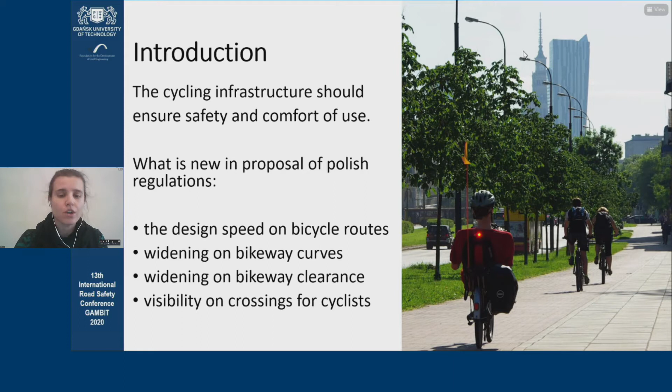There are some other elements there, providing more space, widening of bikeway curves or the clearance. And finally, I would like to talk about visibility within points of collision.

So, what are the particular or special features of cycling? There are three ranges of speed that are important for cycling and for designing cycling infrastructure. Up to 12 kilometers per hour, the cyclist cannot ensure stable traffic. Anything between 12 to 25 kilometers, that's the speed at which an able and adult cyclist goes. And anything above that is not just because the cyclist has a better cycle or is more able, but the gradients may differ, or the weather.

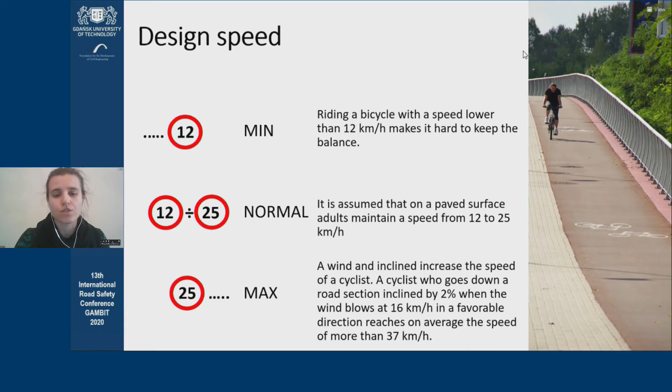And so we ran a study: with a gradient of 2% and wind blowing at 16 kilometers per hour, the cycle speed can go to more than 37 kilometers per hour. And so considering this, plus international experience, it was decided to introduce 4 speeds for designing cycle infrastructure. It's the minimum speed, 12 kilometers per hour, and it should be applied to special situations where we plan to stop the cyclist or when there are some constraints regarding the area.

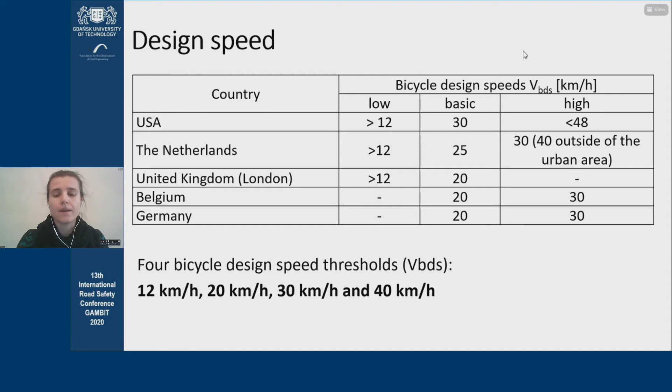But we should really apply 20 and 30 as the general speed, but in special cases this could be up to 40 kilometers per hour. And as you've heard from Dr. Brzeziński, there are some specific situations where it's okay to use these higher speeds.

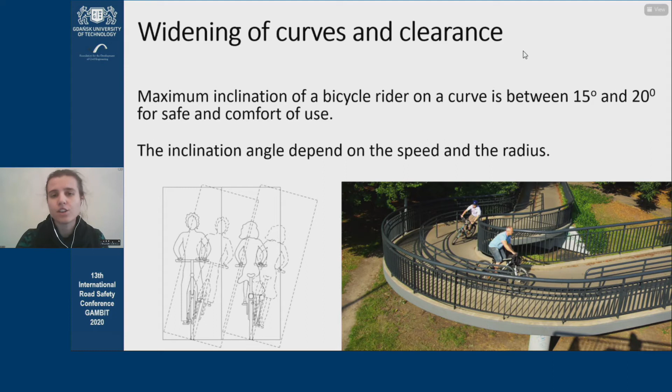The next element in the guidelines is the specificity of cycling on curves. And we know it from studies that when a cyclist goes through a curve, their inclination is at the maximum 15 to 20 degrees. And that's a result of the speed for this cycle road and the radius. And using these two, we know what the angle will be. And if it's anything above 20 degrees, this means that the cyclist is not going to reach the design speed, and instead it will be lower.

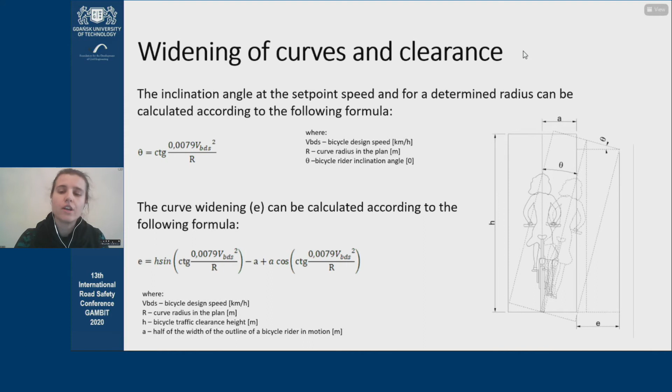And once the theta angle is below 20 degrees or some 15, we can then design for a wider lane. And how wide that lane will be depends on the curve, and also it depends on the clearance zone. So we calculate that using a specific formula. Well, any widening of those zones can only be applied to cycle roads, but when there are no elevated obstacles to the sides of the roads, then we can widen both the cycle road and the clearance zone.

Here is an example of what the widening will look like under extreme situations. So we have the design speed on the left-hand side. In the middle column, it's the curve radius and the widening value. As we can see, the maximum value of widening is not bigger than 65 to 75 centimeters, and that's because of the angle of how the cyclists lean sideways.

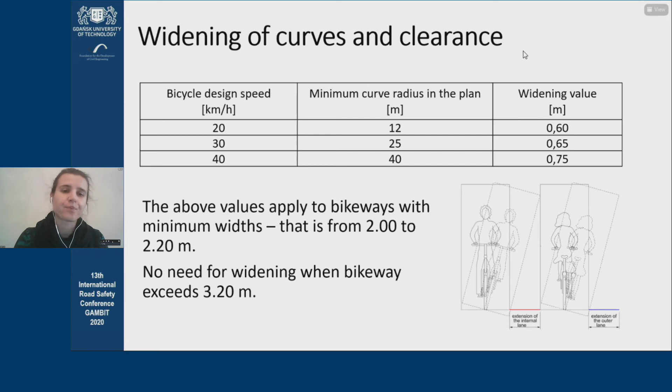There is also an assumption that when the cycle road within the curve is really wide, then we don't have to add any extra widening because the road itself is already 3.2.

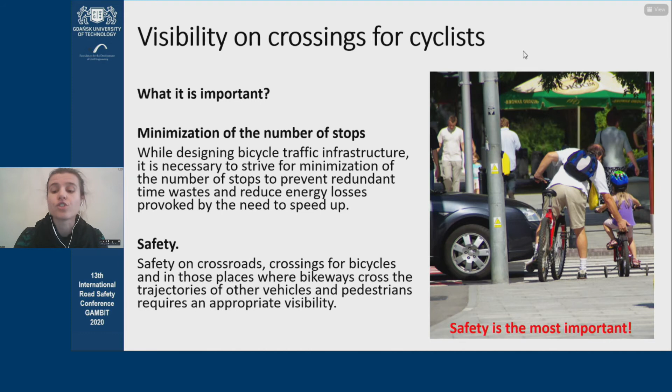Right, when planning cycling infrastructure, we also have to plan for solutions for points of collision. Well, obviously it's important because such points of collision determine the speed, and the more frequent the stops are, the lower the average speed along a route. But it's not the only reason why we have to focus on this. These places are potentially hazardous for cyclists, different cyclists. Please remember that we have a wide variety of cyclists.

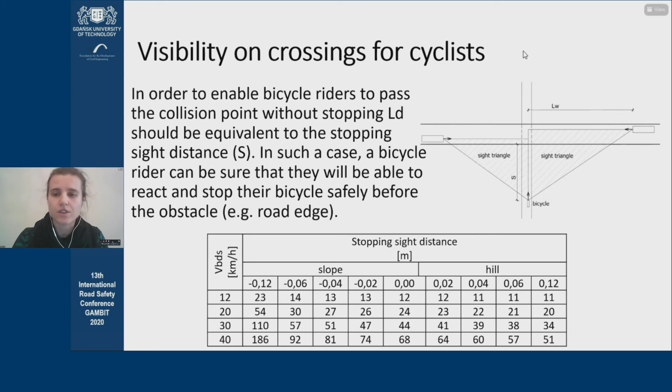And when we define the values for visibility, we assume that over a distance which is equal to the stopping distance, the cyclist should be able to keep an eye on the point of collision so that they can adjust the speed accordingly. If they can see an oncoming vehicle and they don't have priority, then they will not accelerate. Instead, they will slow down.

So considering this, the LD value, which is one of the arms of that sight distance triangle, has to be determined using the design speed for cycle roads. And there are three groups here. We assumed that at points of collision, we cannot assume that cycle traffic will be at 30 to 40 kilometers per hour. Instead, we think that points of collision shouldn't be at more than 20 kilometers per hour. So that's group one.

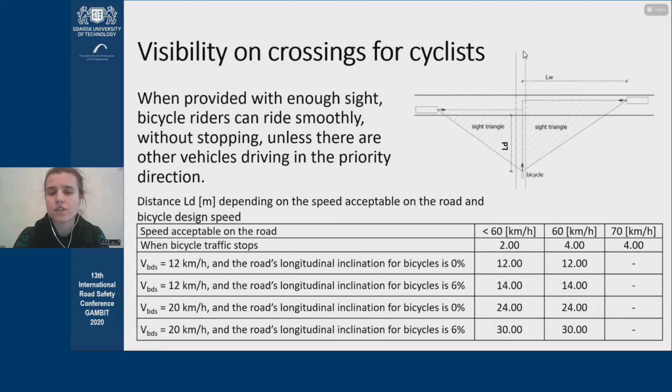This is followed by another group at 12 kilometers per hour. So yes, this is still smooth traffic, people crossing that point of collision. And finally, cyclists coming to a stop. So the length of LD is also affected by the gradient. And here again, we assume that the gradient shouldn't be higher than 6%. And this really is the result of the big changes. I mean, the higher the gradient, the more it affects the stopping distance.

Moving on, the LW value, considering the speed of the vehicle. This is how we determine the distance LW, but cycle speed is equally important, and we've split this into two situations: the first situation when the cyclist has to stop, and the other one when they can drive across the point of collision without stopping. And obviously, we also have the gradient included here, whether it's close to 0 or whether it's 6%.

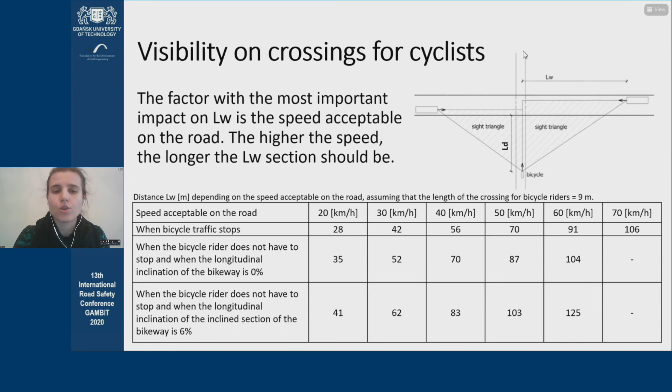So LW here is really different when you look at where the cyclist has to stop before the point of collision or when they are allowed to cross that road without stopping. Well, when a cyclist stops, they need some extra time before they can go back to the original speed when they take off from the 0 point. Now the conclusions.

The changes have been proposed to the draft design guidelines. And their objective was, first of all, to ensure that there is consistency throughout the design process. What we want to achieve is to ensure a constant design speed along the whole route. Cyclists, as they go from A to B, can use a variety of different routes consisting of roads and lanes or dedicated roads. At the end of the day, the idea is for all these elements to be cohesive, consistent, which should support the design process. But all of these elements have to be met, and safety comes first.

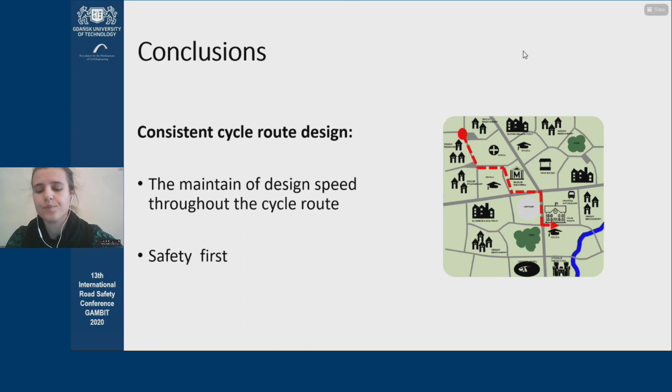And my final conclusions. What the regulations can actually do is be very open about what the standards are today. But what I don't want you to think is that cycle infrastructure should be designed for 40 kilometers per hour. Instead, what we really want to achieve is to raise awareness about what the actual parameters should be, so that the objectives set out in the documents are really achieved.

We have to follow the parameters in an informed way. So if we design the speed for 30 kilometers per hour, then we have to ensure the right radiuses, the right widening, or any extra space if needed, etc.